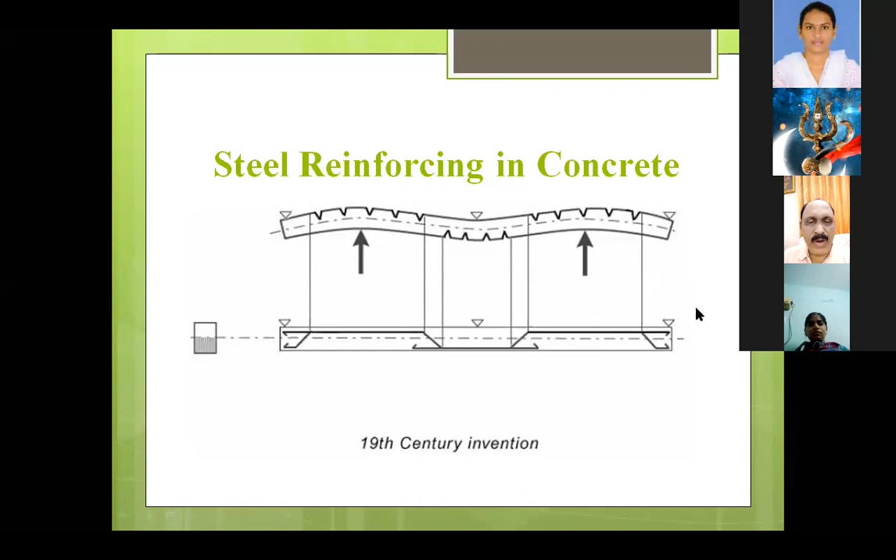The basic concept of concrete is that concrete is good in compression, but concrete is very poor in tension. Based on the capacity of the cement used, the tensile strength of concrete may vary from 1/5 to 1/15 of its compressive strength, based on the materials used. So basically, concrete is a strong material for compression.

In India we commonly use concrete from 10 to 40 Newton per millimeter square strength. But recently I have seen in Germany they have made a sample concrete of 150 Newton per millimeter square strength, so high that it is almost the strength of the erstwhile mild steel which we used.

So when the concept of concrete got popularized, people were concerned why concrete cannot be used on the tension side also, so that a concrete block can be used as a flexural member, on the compression side as well as on the tension side.

On the tension side, there was no choice because it used to crack. Then came the suggestion by some good scientists that on the tension side, if you reinforce with a material which is very strong in tension, that will become a balanced material. It can take tension as well as compression, so the longevity and use of the material as a flexural member is possible. That is how the concept of reinforcement came for concrete.

The reinforcement mostly available at that time was metals like steel and aluminum. Steel is basically a modified version of iron, with impurities up to almost 1% of iron being what we normally call steel. In very few cases the impurity level may go beyond that based on requirement, but normally we use very low-impurity iron as steel reinforcement.

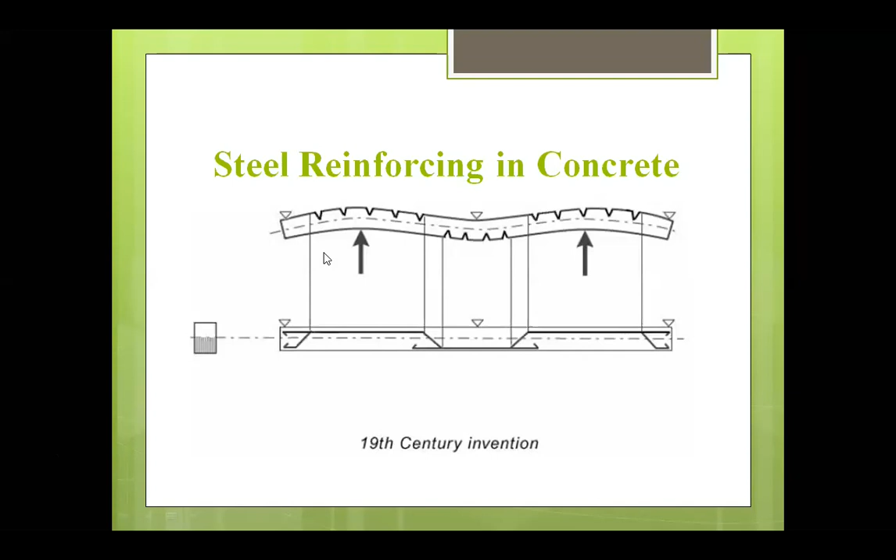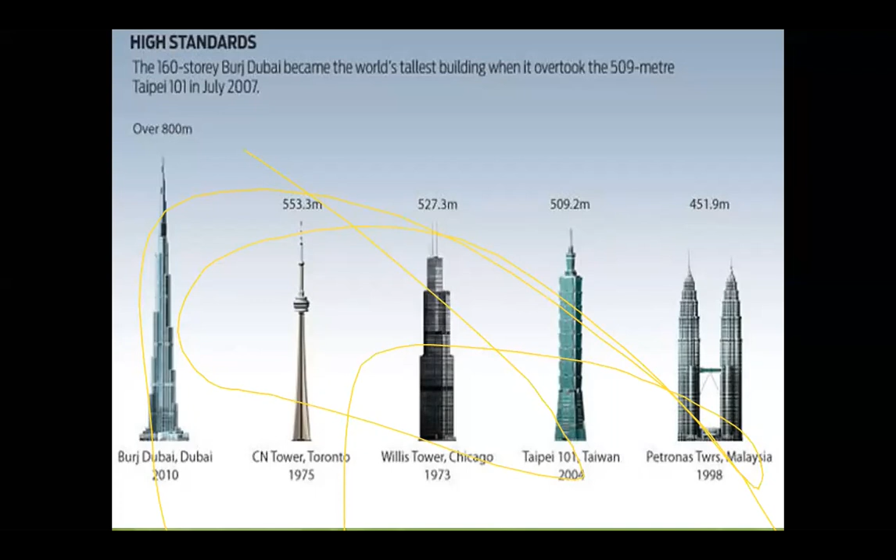Coming to the next slide, these are examples of the poetry I mentioned. The tallest building now available is the Burj Khalifa Tower. Actually now it is called Burj Khalifa Tower, earlier it was called Burj Dubai Tower. Now that it has been sold out, it's called Burj Khalifa Tower. It is 830 meters tall, nearly 1 kilometer. A new tower is coming up in Abu Dhabi, over 1,000 meters, taller than a kilometer, but it's not completed, so even now Burj Khalifa is the tallest.

Then compare it with the near-tall buildings. On the right you can see the CN Tower in Toronto, the Willis Tower in Chicago, the Taipei Tower in Taiwan, and the Petronas Towers, a twin tower in Malaysia. These are all close to it, but definitely the Burj Khalifa Tower surpasses them all. In that diagram it is given as Burj Dubai Tower, because when this comparison was done in 2010, it was still called Burj Dubai Tower.

At that time the building was around 830 meters tall, but on top of it, 244 meters is a single steel spire or steel column. So the building as such is only... am I right... 830 minus 244, that's 586 meters as the building itself, with 244 meters of steel spire above that. It's an example of a very well-designed building. Being the tallest in the world, it definitely has to be well-designed.

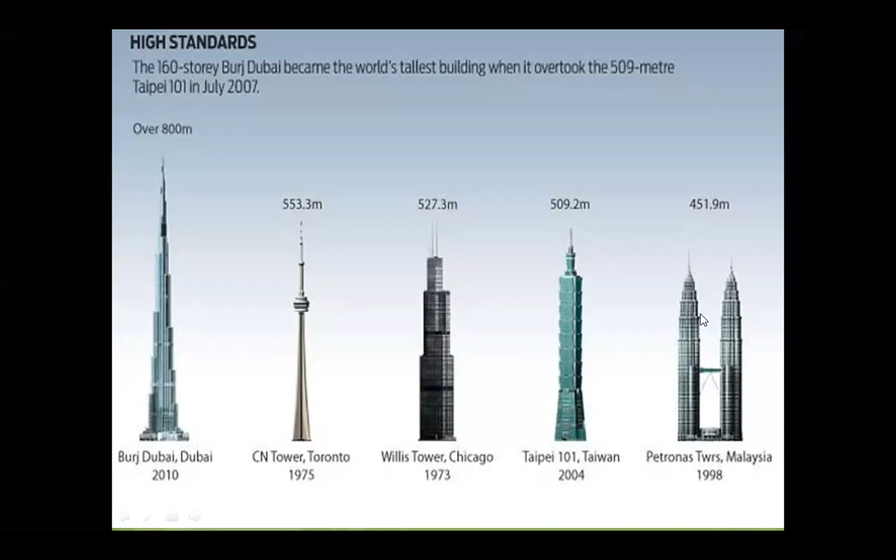Come to the next slide, you will get more information on how that poetry is made out of concrete. This diagram shows a part of it. The left side shows the steel spire, which as you know is 244 meters tall, and you see a man standing on the right side to show the human scale, how many people's height that tower is. On the right side you can see the foundation, though I don't know whether you can read it clearly.

The total weight of the structure is almost 5 lakh tons. Just imagine, 5 lakh tons is the weight of the total structure. And that steel spire alone, which is on top of that building, is alone around 4,000 tons roughly.

So imagine the weight. You can see the foundation given on the right side. That foundation has 1.5 meter diameter steel piles, and each steel pile has a 50 meter depth below ground level. 50 meters itself, if you give 3 meters per story, is around a 15-story height below the ground level.

So it's a very deep foundation, because the design was done by a Pakistani structural engineer working in the US. The most difficult part in designing this was, as those who know tall building design know, when buildings become taller, up to about 5 or 6 stories, the dead weight of the structure is the most important parameter for analysis. But when the building goes about 10 stories or so, it's not the weight which is the determining parameter—the wind and earthquake loads are.

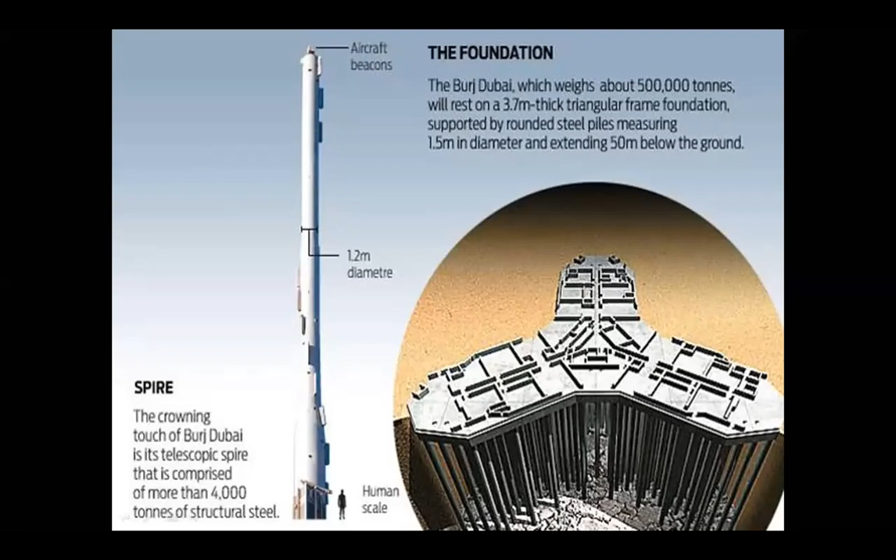Why I mentioned this is, every civil engineer should know that such poetry can be carved out of concrete. It's a concrete-cum-steel construction, though the spire is fully steel—the top and bottom are full steel. The spire is steel and the pile is steel, because steel is a good material equally good in compression and tension, and it's one of the best materials for construction. Obviously, they have made it rust-free steel.

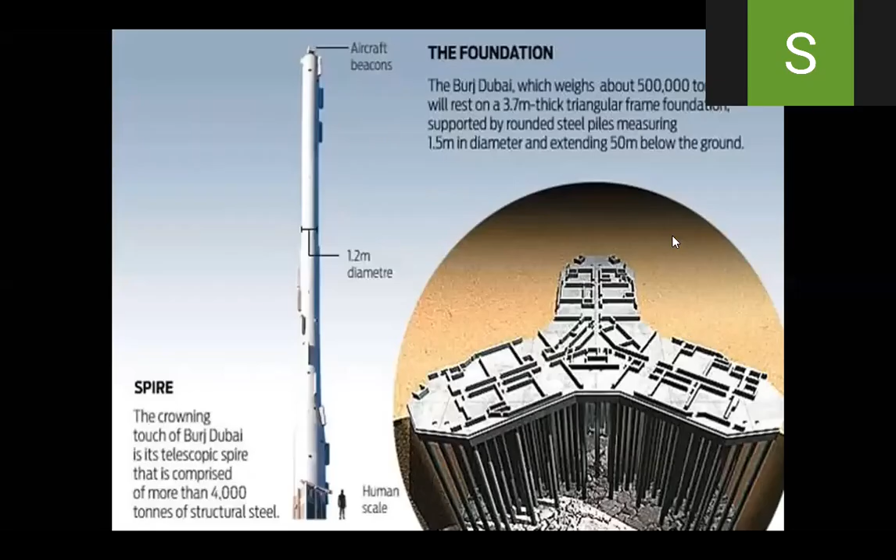I'm just showing a sample of a T-beam. All civil engineers know this. We have in a T-beam a web and a flange—the top portion is what is called a flange. Almost all beams in concrete buildings are only T-beams or L-beams; independent beams we never have.

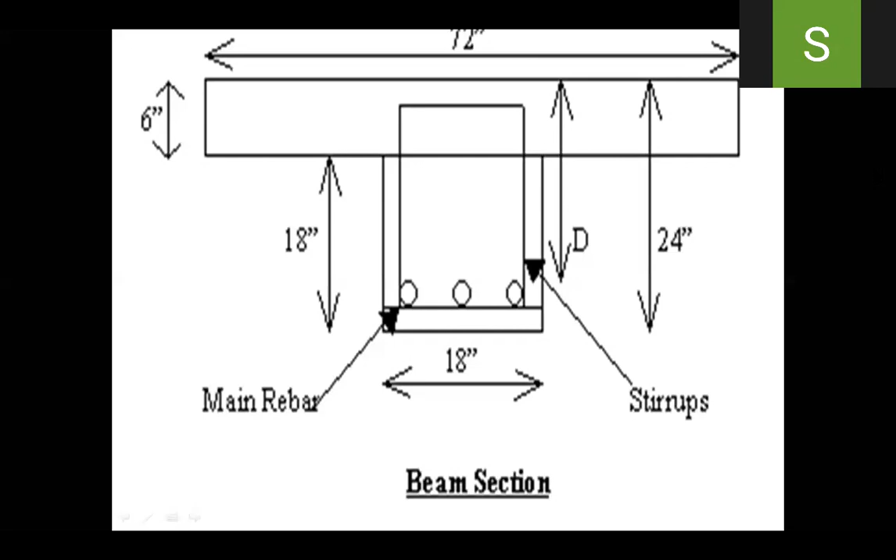But steel-cum-concrete buildings may have some independent beams which are rectangular in shape, though most of them are not. So I just wanted to explain the terms: the flange is the top portion, the web is the bottom portion. Most of the time, the main reinforcement will be rebar—which stands for reinforcement bar, a steel bar—and stirrup stands for the connecting steel, normally rectangular or circular in shape. I'm going through these basics for everyone to understand.

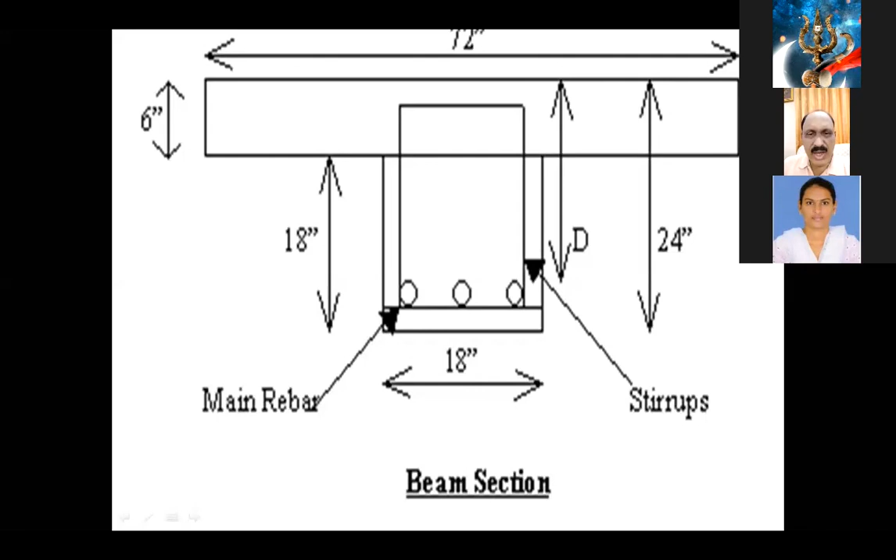And this is how normally a beam section in reinforced concrete will look. Let's come to the next slide.

Some more details are shown in the next slide. This is a reinforcement detail of a beam. On the right end is shown its cross section, and on the left side is shown its longitudinal section. So this is a detailing.

Showing the reinforcement in detail is called detailing. This is not with any other purpose; I just want to tell you that this is the way reinforcement has to be detailed when you give it to the contractor, because normally there are 3 people involved in construction. The first is the planner, who will plan the building with dimensions. The designer, who is a structural engineer, will design every element - the beam, column, footing, slab, pier - everything the structural engineer has to design and give in this form to the contractor, who has to construct it. He is the third one.

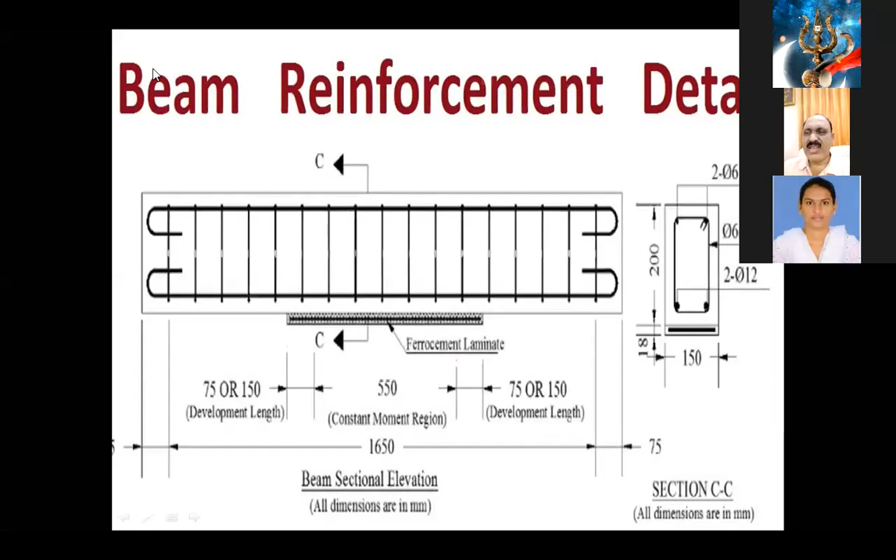Okay, now coming to the next slide. This is just to show how we submit the structural plans to competent authorities. In most corporations and municipalities, and in Kerala, most panchayats also, you have to submit for tall buildings the structural detailing along with the plan, elevation, and the layout plan of the building.

So this is a sample sheet. I'm not going to explain it, just to show for a beam how the reinforcement is shown, how the cross section is shown. Here 2 beams are shown: one is a continuous beam and one is a cantilever beam. This I'm not explaining because it's a sample, just to make you feel how the detailing is done. For experienced people, they know this. This is the way it has to be submitted, in a big sheet.

Now AutoCAD is used for detailing these things, and at submission time maybe such sketches, around 30-40, are on a big sheet, because we can go up to A1 size in AutoCAD. Some municipalities and corporations restrict it to A2 size, so that they can expand and see, because they are also having the software, they can expand and see.

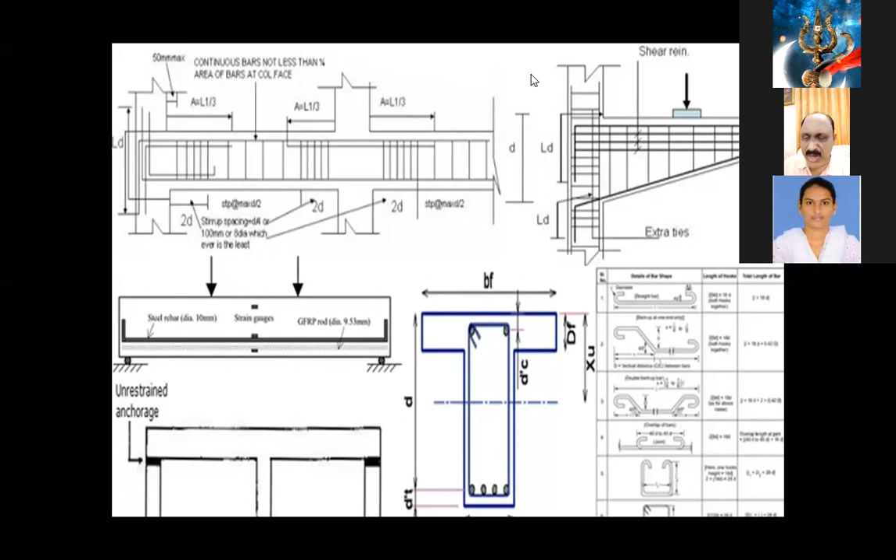Because in most of the analysis, 99% of the time, we take the joint, the column-footing joint, to be a hinged joint. We do not take it as a fixed joint, because those who know the analysis will know that in any analysis method, if it is taken as a fixed joint, so many indeterminacies will be there. The number of indeterminates will be high, so analysis will be almost impossible. Computerized analysis exists now, but we will get only an approximate calculation. That is why in most analysis, the column-footing junction is taken as a hinged junction. If you take the column longitudinal bars into the footing, it becomes a fixed or rigid joint instead.

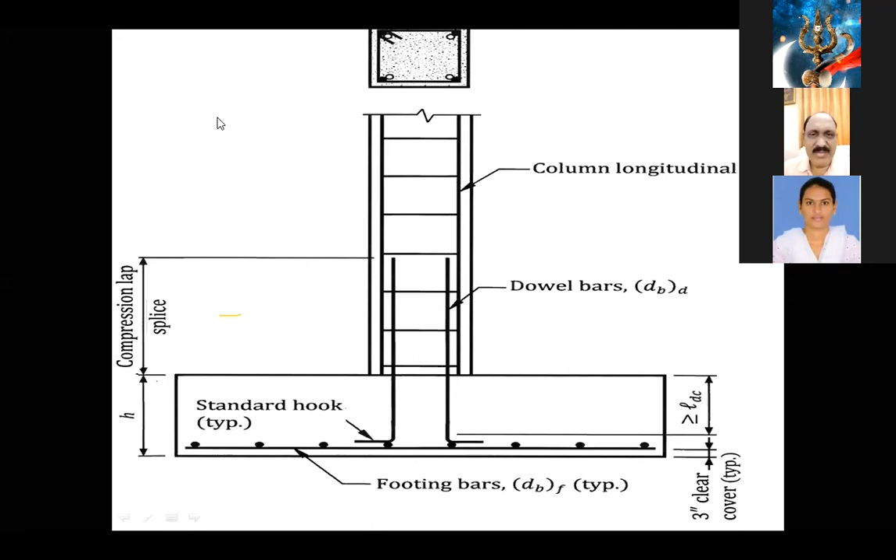Now, one of you can just comment whether you are hearing me properly and whether the way in which I am explaining is sufficient or some change is required. Anybody can comment. You can unmute yourself and comment and then mute. Not all. Clear. I'm not hearing anyone. I think somebody has put a message. Let me see that message. Chat box, some message is there. No, it has nothing about this question what I asked. Because I'm just imagining that you are understanding everything and you are seeing everything. Just wanted to confirm. Yes, everything is going on good, sir. Because in such an online session, I have to cross check in between whether things are going on well. Otherwise, I may not know. Yes, many have replied. It's going on well. Okay, now come to the next slide.

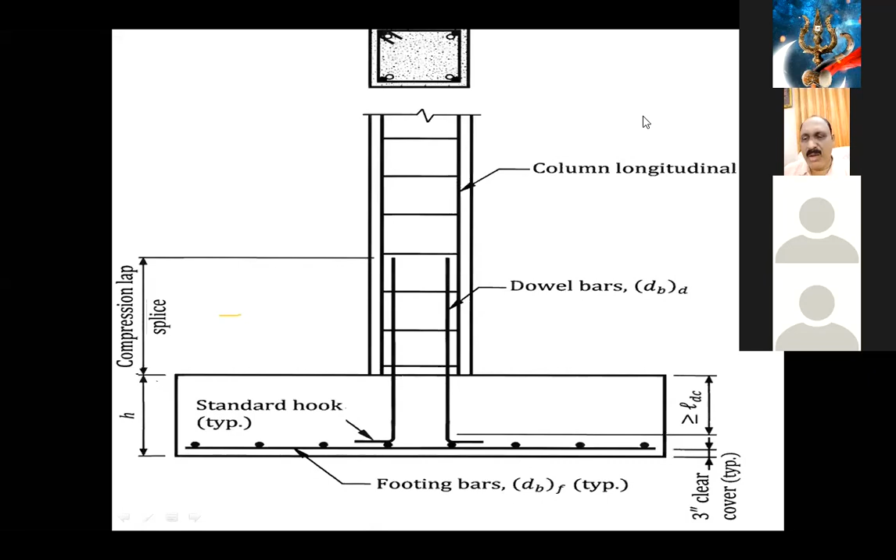Structural engineers may come up with a doubt why crack can develop there, because both end supports are there. Because in most of the cases, the columns at the ends will be having less moment of inertia compared to the column at the mid, which will be stronger or stiffer. So there is every chance that the ends can subside, the ends can settle, whereas the mid column will not settle. So this is common. I have seen many places. So there also this pattern of reinforcement should be given. I think you understood that.

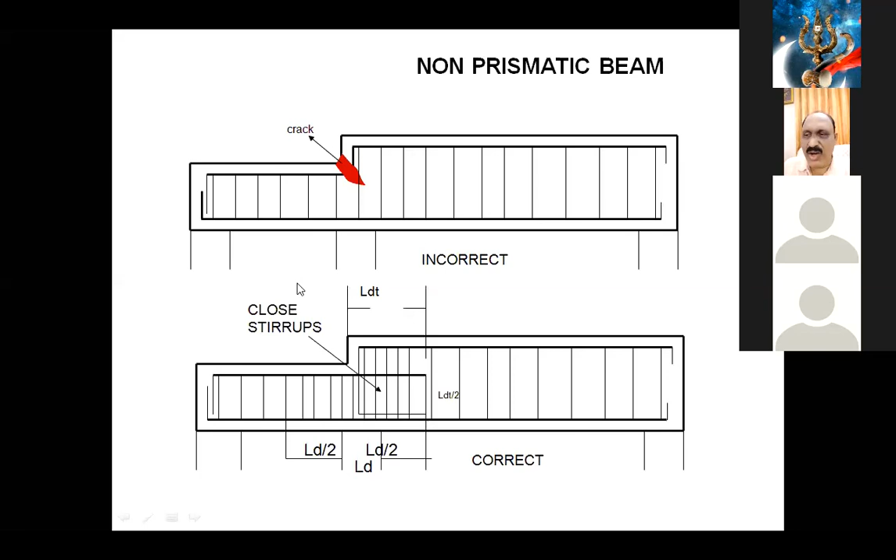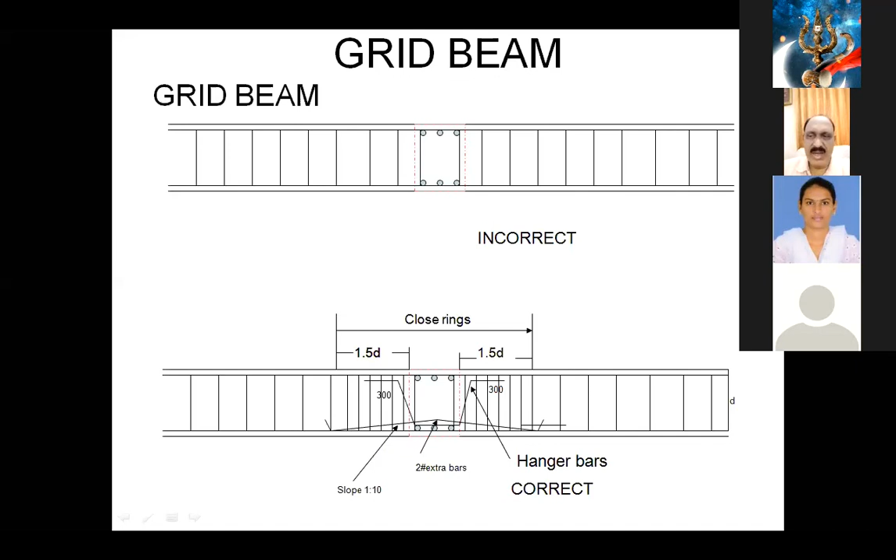Now coming to the next one, grid beam. Now what is a grid beam? A grid beam is basically one beam crossing the other beam. There are so many types of grid beam. For example, equal size grid beams are very common, which we use in grid slab. To reduce the depth of the beam, we will have a grid beam style where so many beams will be spaced at 1 to 1.5 meter spacing, and that makes the grid beam pattern. In grid beam, the main beam and crossing beam will have the same dimension.

So what happens is, when one beam is crossing the other beam, the one which is slightly higher in depth we may call the main beam. Or if one beam is having more reinforcement and the other is having less reinforcement, the one having more reinforcement we call the main beam. The other one which is crossing it is called the sub beam: main beam and sub beam. Normally, the sub beam is done in the way it is shown on the top.

You just see. But if the sub beam is done that way, after a period of time... for example, I had to go to one university in Kerala where there was a big building where all these sub beam joints had cracked. The registrar was very confused what to do. So we had to go and inspect, and I found that wherever the main beam and sub beam were joining, there was a crack, and students have to sit inside its classrooms. So we identified that they made this mistake which is shown on the top side. That is why I suggest this correction.

And many of these things which I am explaining will not be available in textbooks, because textbooks only give the standard design. So you can see the figure and study it thoroughly later. See, for example, in this correct diagram at the bottom, we have given what are called hanger bars, and we have given extra bars at the bottom with a slope of 1:10, provided for a distance of 1.5 times d, where d is the effective depth of the beam. I take it for granted that you know what effective depth and total depth are. Otherwise it's not usable, because only then can you use it properly.

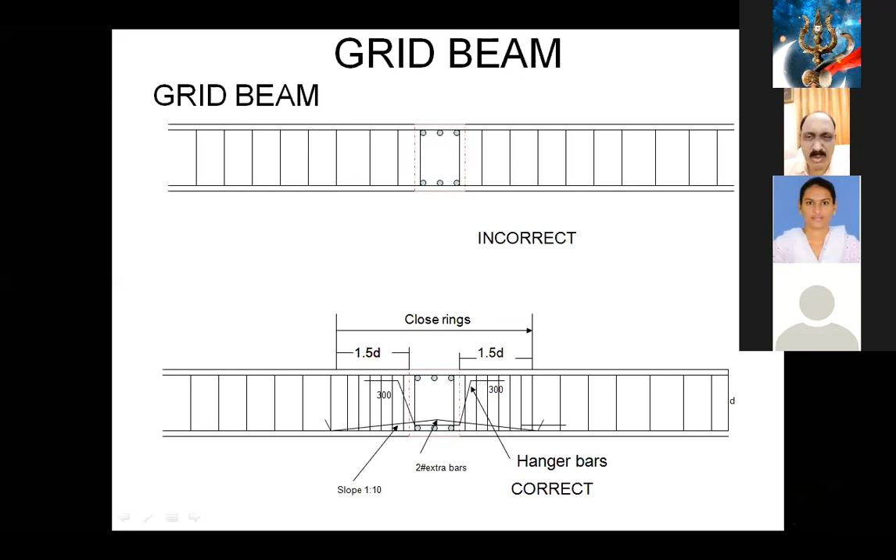Now coming to the next slide. When secondary beams are less in depth: in the previous case I said the secondary beams or sub beams and the main beams have almost the same depth. Whereas here, say for example, the main beam has 30 centimeter depth and the secondary beam, the sub beam, has only 20 centimeter depth. Secondary and sub are the same. In that case, you can go for such a pattern.

There also, if you go for the top pattern, cracks are likely, because any beam to beam joint or any column to beam joint, as you know, is a point of weakness, a point of crack, a point of discontinuity and a point of stress concentration. All this comes because of stress concentration there. Those who have studied fracture mechanics know that the stress concentration is many multiple times there. It can go even up to infinite stress concentration at some points. That is why cracks develop at all these points.

Now, the correct positioning I have shown below; that is the way it is to be done. Nowhere have I mentioned the bar diameter. The bar diameter depends on the main bar size you are using for the beam. Say, for example, the main bar of a beam is 12 mm. For the hanger bars and the additional bars, you have to provide the same diameter. Suppose you are using a stirrup of 10 mm or 8 mm; the same diameter you have to use for these stirrups also. That is why I am not giving those dimensions, because it depends on what size of beams you use. Come to the next slide.

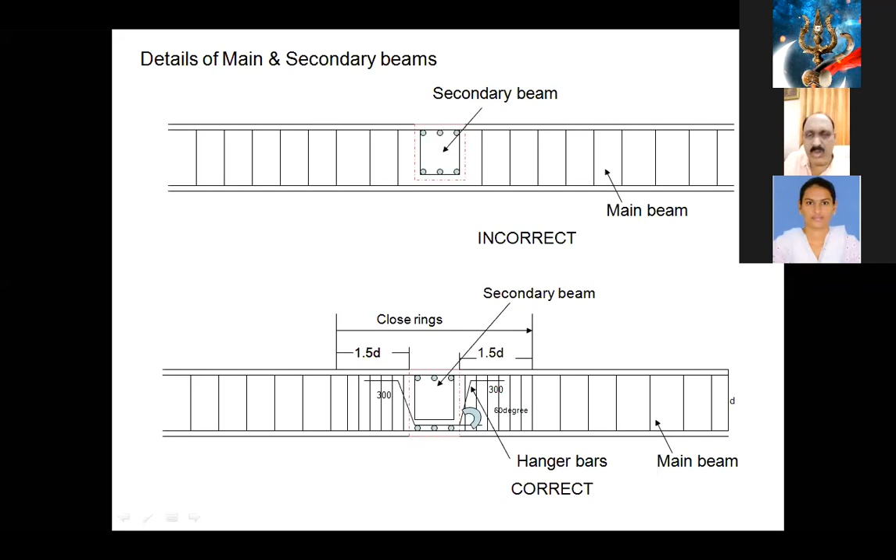It's a simple beam. Nowadays, we don't bend the bars like this. You see, for example, at the top, the main reinforcement is bent. You know by theory, in a beam, especially when a beam is simply supported or continuous, simply supported only with semi-rigidity it will happen. Otherwise, for continuous beams or fixed beams, the reinforcement has to be more at the top.

I was once inspecting a site for which the engineer was my student, and the span of the beam was around 5 meters, RCC beams. I found that the reinforcement was more at mid-span and very little at the supports. I asked him, and of course I had the liberty because he was my student, why the reinforcement was like that. And he said, sir, at midspan we need a lot of reinforcement. I said, it's wrong. You have the wrong conception.

In a big, long beam like this, where it is continuous, the higher concentration of main reinforcement is supposed to be at the end span, where the columns are supporting it. And that is very necessary. So this concept has not reached many people.

Many people feel that the reinforcement has to be more at the midspan. It is wrong. In beams which are having very long span, the main reinforcement, the highest quantum of reinforcement, has to be at the supports on the top side, not on the bottom side.

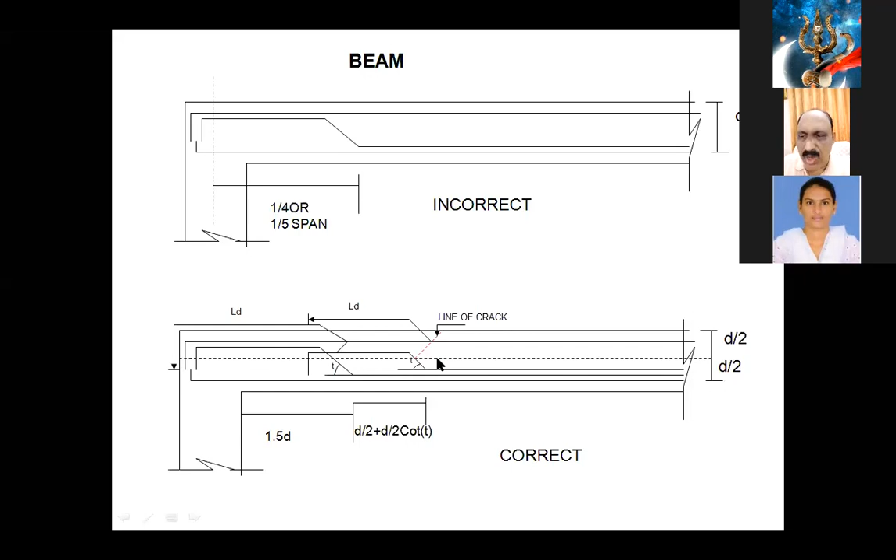Now coming to the next slide. The incorrect method is given on the top and the correct method is given on the bottom. See what is the difference? Many people go by thumb rule while placing the reinforcement. You would have seen that in most of the small works, even up to 3-4 stories, the beam and slab reinforcement, and most of the times the column reinforcement also, which is very dangerous.

They will say that for the other building we used this much. I've seen most of the owners and contractors saying, we did another building there, we used it like this, so this building also we are giving like this. It's a foolish thing, because when you analyze the structure, you will understand the difference in the pattern or behavior of the concrete and the structural member.

One simple experience I had: once I had given the design for 18 mm bar, because 16 was very less and 20 was very high. So I checked with the shop whether 18 mm bars are available. They said it's available, and I gave the design for 18 mm bar. By the time this contractor went to purchase the bar, 18 mm was out of stock. He purchased 16 mm and substituted all the bars of 18 mm with 16 mm.

When I inspected the site, he was saying, sir, 18 was not available, only slight difference, I have put 16 mm. But it's not a slight difference. The area of steel between 18 mm and 16 mm differs by more than 20%. He doesn't understand it, but being a designer, I can understand it. So keep in mind, such simple adjustments are very dangerous in concrete.

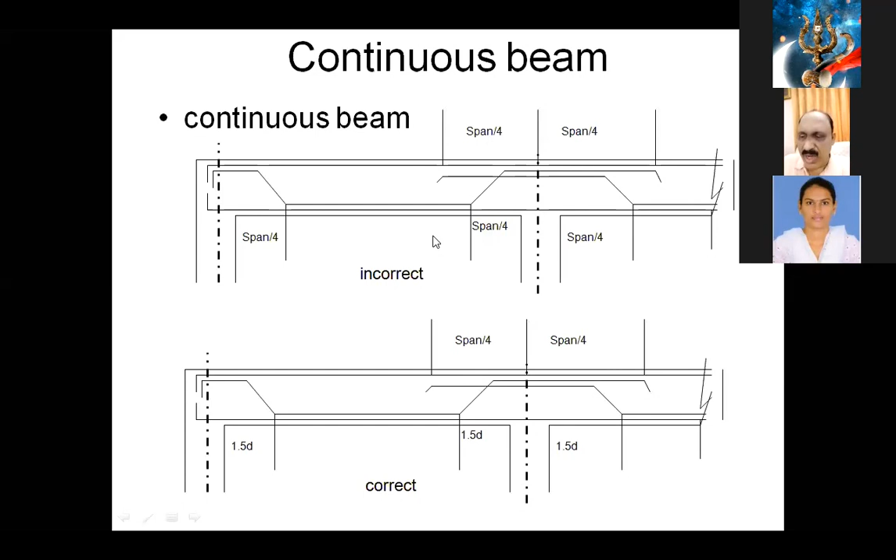So at some stages, I used to do only analysis on the software and used to do design independently, manually. But nowadays, what we do is we do the analysis and design on software. Then design, we will check element by element and correct it. Otherwise, it will be a big blunder when we give to the client. That is to be done. Designers, please note. Now, coming to the next slide, you see that slide.

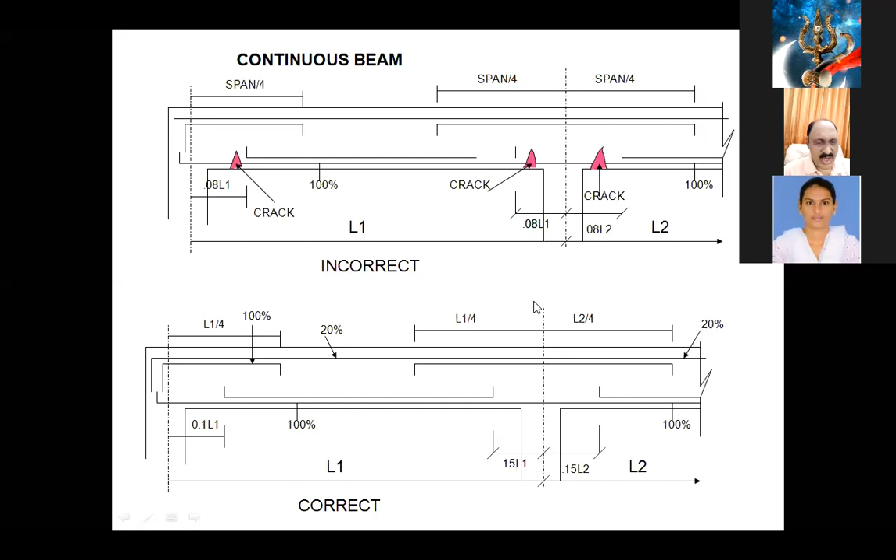Now see the mistake. This is self-explanatory. The diagram given on top is wrong, and the diagram given on bottom is the correct one. Because bending I cannot explain by word. You can see. I think it is visible to all of you. And those who are using a mobile, you can expand on the screen itself so that you can see it big.

My last webinar, somebody was asking, sir, we are seeing only small sketches. I told you, just expand. You can stretch on the screen. Now come to the next one.

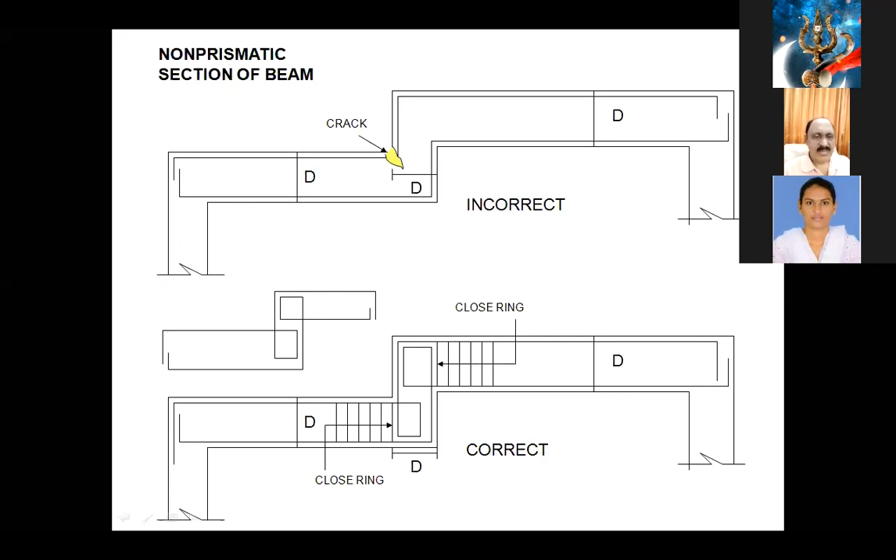For a cantilever beam projecting from a column, you can see the top one. The column is on the right side. Cantilever is projecting left. In column beam connections, there is what is called a pull-out phenomena. This type of construction I have seen many places. The top diagram, I have seen many places where the cantilever will be hanging gradually.

And why should I say other cases? When I was studying third year BTech, I designed some beams for my own home, where I was not thorough about this pull-out mechanism. And after 3 years, I have seen that cantilever beam end is coming down.

So this can happen to anyone. So that is why you see the bars on the bottom diagram, where the main bars on the outer side of the column have to go deep, at least to one development length below. Even more is better, so that no pull-out occurs.

This type of construction many times happens in small houses and all. Small cantilever just projecting out, either for a car porch or for some supporting structure. It can happen. So be careful that the textbook will not say exactly this pattern. The textbook will show that the reinforcement has to end there. That is why I'm showing it specifically.

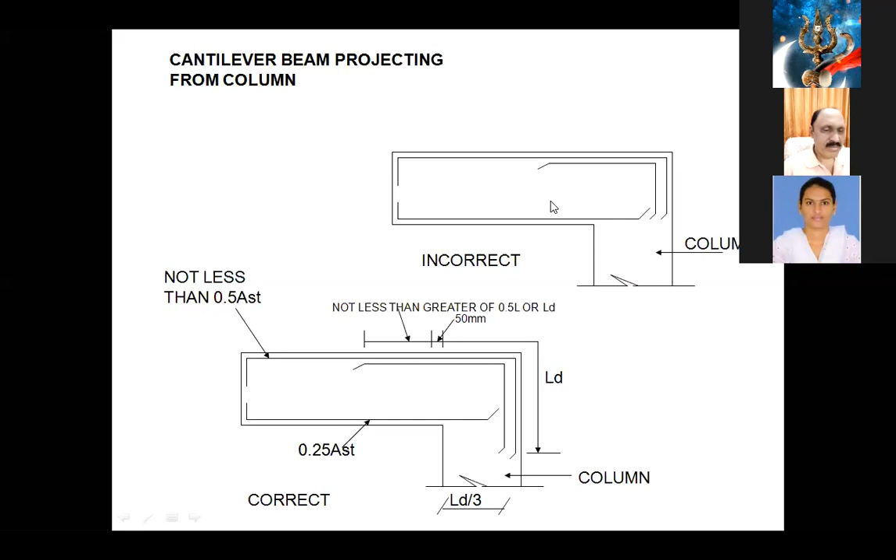Now see the next diagram. This is a very common mistake I have seen in Kerala, because in Kerala, the low-cost housing popularized by our Kerala State Nirmithi Kendra and the Laurie Baker movement, they have gone for such roofs of small span, 10 to 15. Of course, they have done the reinforcement properly, but the people who imitated, and many school buildings I had to inspect for such cracks. School building may be 4 or 5 meter span.

LD stands for the development length. Don't worry about minimum LD. You give a bit more than LD, because normally in such slabs, the reinforcement diameter will be very low. You know, most of the sloping slabs will have only 8 mm reinforcement. Even 10 mm is very rare. Okay.

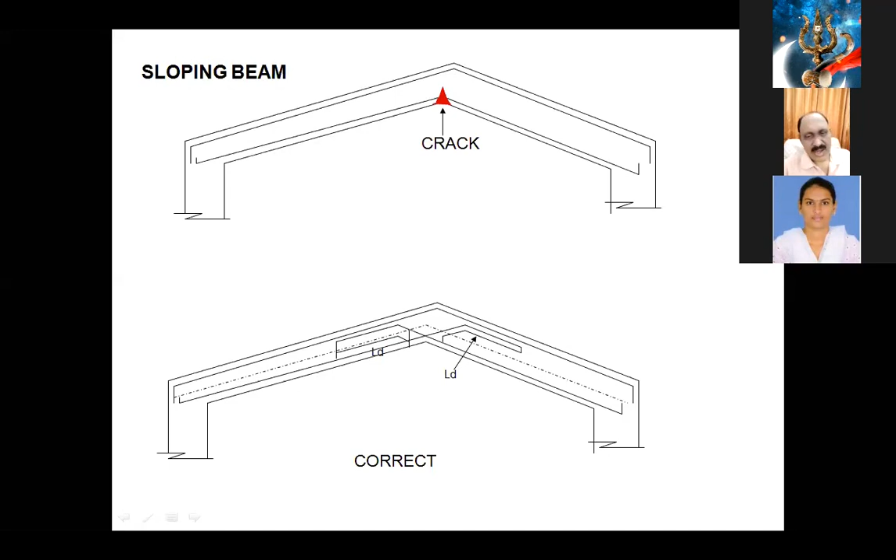I know that many of you will have so many doubts regarding all these things, because you take this only as an introductory session. And if you have to go deep into how much should be the diameter, how much should be the spacing, etc., it has to be problem specific. It cannot be generalized. Many people do ask me specific cases. I ask them, you draw your reinforcement pattern and send to me. I'll say what is your mistake. That will be the easier method. Now go to the next slide.

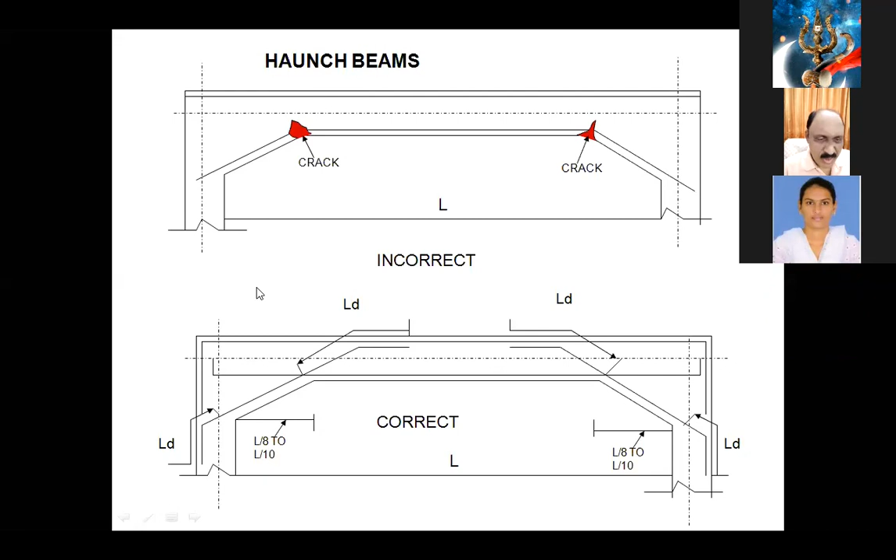Any folded plate, whatever is the method you use for analysis, many methods are available for analysis. Nowadays, even computerized programs are there, but whatever is the method, the analysis will give the steel uniform, but that point is a weak section where we'll have to see that both the steels are extending inside instead of bending there. They go straight, don't bend there, so that they will overlap each other to a development length. That is what I have shown in the previous sketch. Now coming to the next slide.

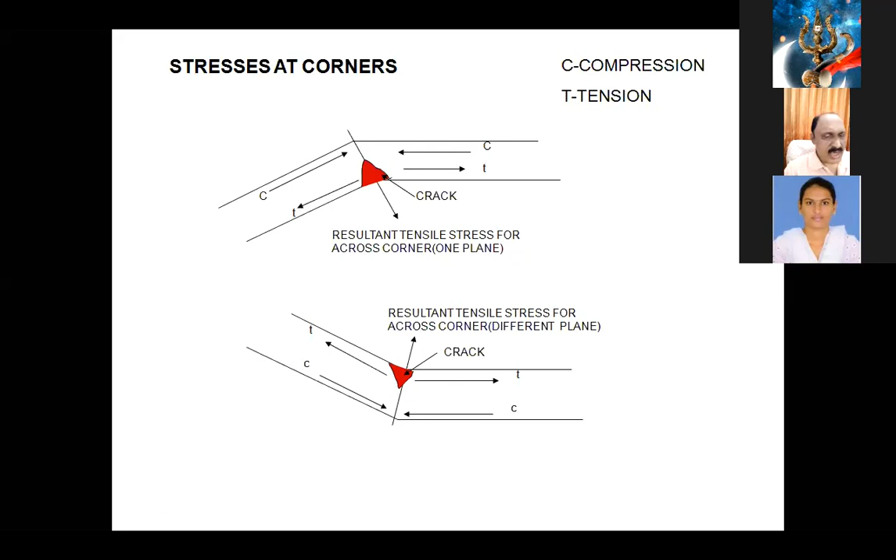Many people are concerned about giving the tension and compression reinforcements. Many times the shear reinforcement is ignored. Remember, in deep beams, the shear reinforcement is equally important as the tensile reinforcement or compression reinforcements. And that is why if a beam is more than 1.5 feet, or nearly 45 to 50 centimeter deep, more than that deep.

It depends on the depth of the beam, but always keep in mind, any beam more than half a meter, be careful about the shear reinforcement. Otherwise the crack pattern which develops will be shear cracks. You can easily identify a shear crack on a beam because shear cracks will be angular, whereas tensile cracks will normally be perpendicular. So just by seeing a crack, we can say what is the problem with the beam, by experience.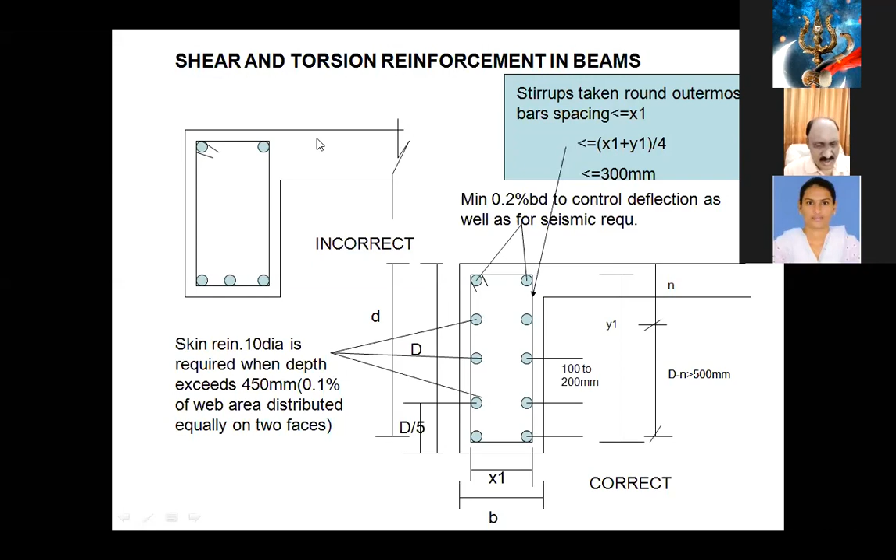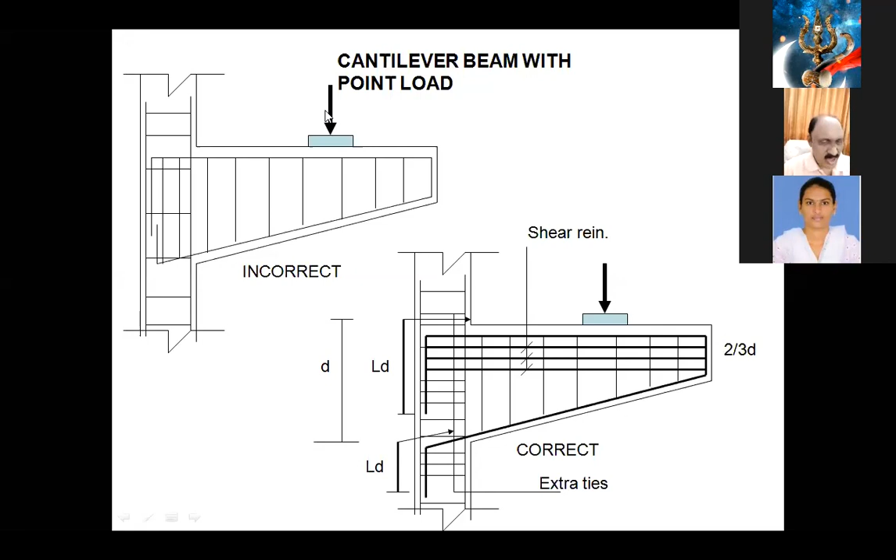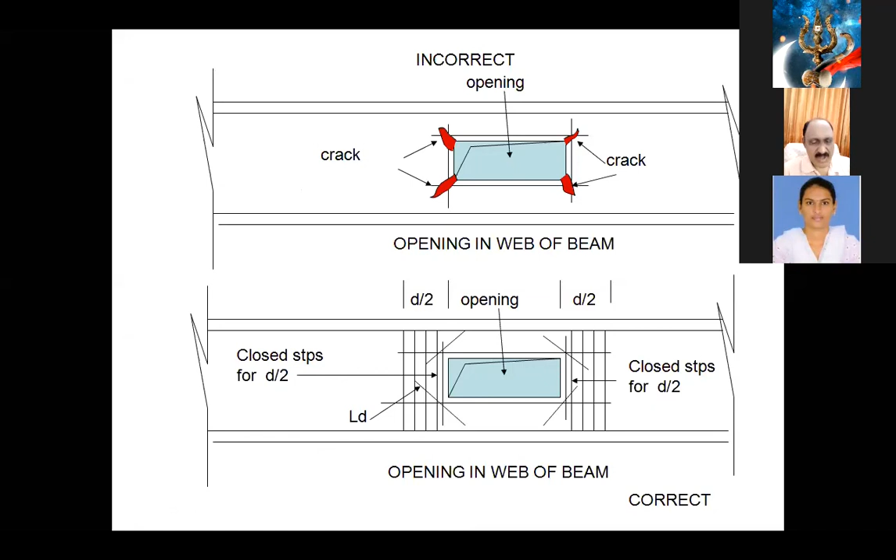You have not shown that. Your slide is even this one. This is the slide, not this, the next one. Okay, okay, this is a slide which I was explaining. Now go to the next slide. Now you can go to the next slide.

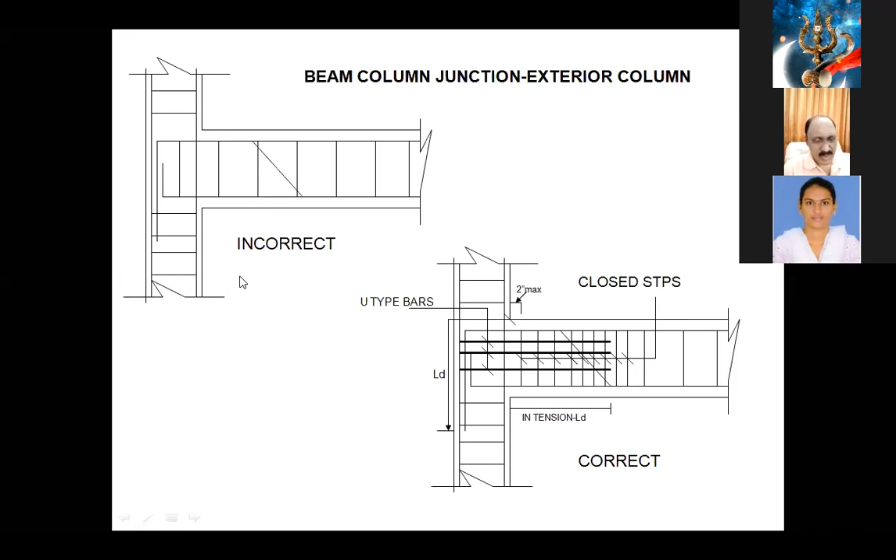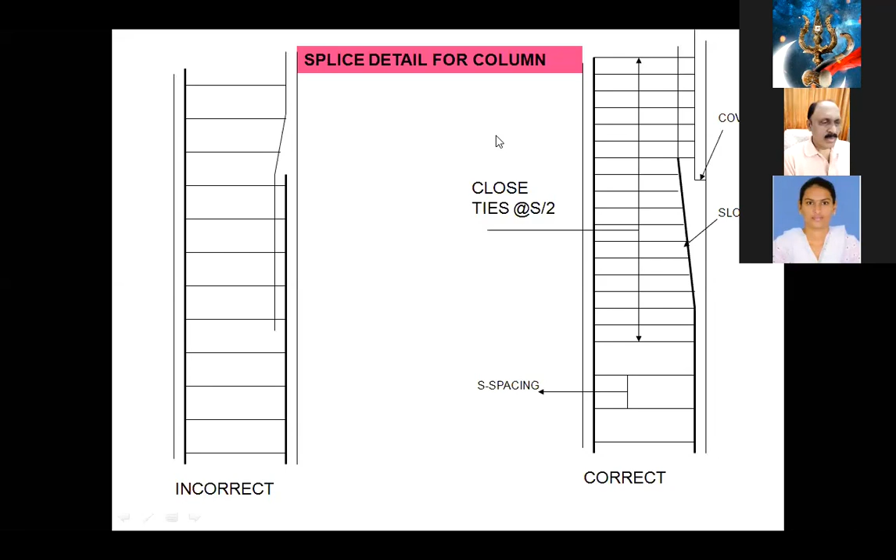Suppose the column is reducing in size. You see there, this is where a lower story and a higher story meet. This you will have come across many times.

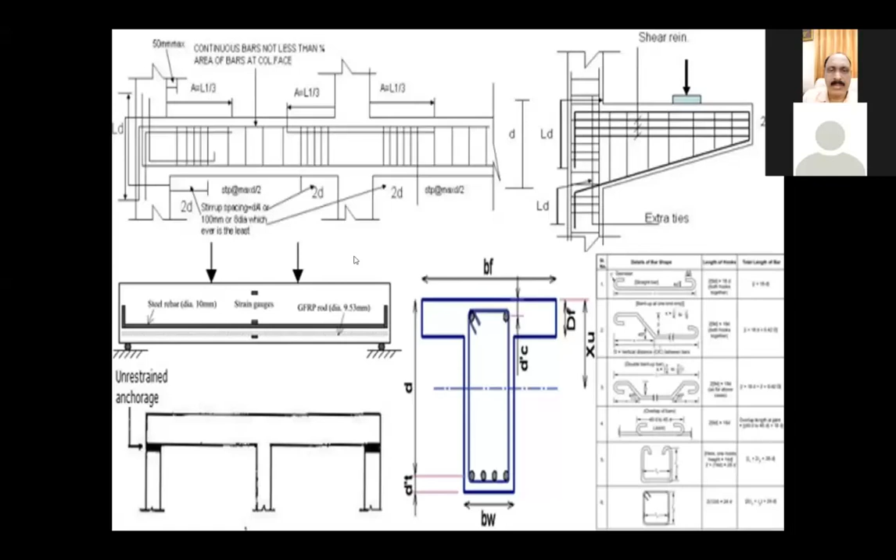Future construction materials should be different, not becoming that common. Maybe after 10 or 15 years, reinforced concrete came to India in the early 20th century, and then it became popular only in the 1950s and 60s. Households became RCC only in the 70s. So it's very recent, only 50 years we have seen this boost of concrete used in construction.

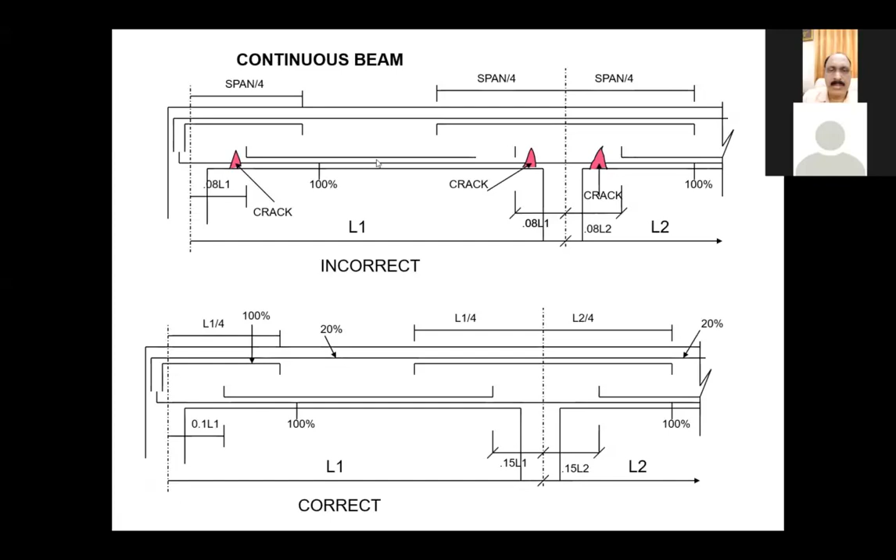It will go away. Moreover, post-corona, post-COVID, construction technology is going to change drastically. Now people have some other concern. Instead of show-off in a building, concrete has been used as a show material because it's a bulk material. Anyway, all that will change. I'm not going into a detailed session.

There is another question. How can we fix the problem raised while laying foundation in the area where the water table is high?

In the area where water table is high, we have many techniques which we use. One technique is dewatering. We make a big trench nearby, or in the same trench we make a small trench in the corner and we just pump it out. That is one method. Another method is we use either hydrophobic cement or quick setting cement and we can do the concreting. And the third method is we will wait.

That is what I advise people, when the situation dries up. Instead of going for construction in the rainy season, it is highly uneconomic. If there's a chance that the water table will go down, wait for that and then have the construction. These are the techniques we use.

Then another question: a textbook showing incorrect and correct reinforcement details would be useful. Such a textbook is not available. What I can do is give you this presentation, which has the drawings and explanations. Such a textbook I have not seen in my life so far, so I cannot advise you.

All the textbooks will give the design and reinforcement, but they will not go into the meticulous nature of how it is to be placed and how not to be placed. In one or two books I have seen some guidelines on how not to place it, but very rarely.

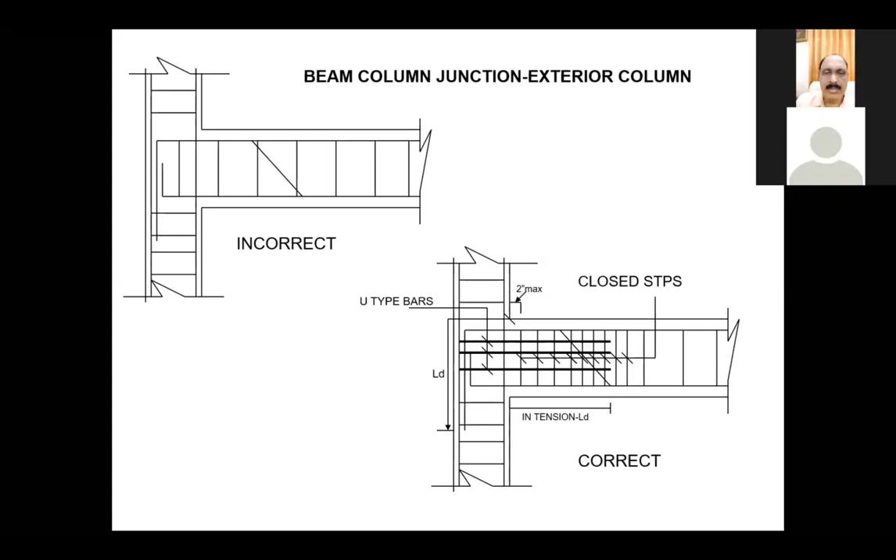What is the reason mild steel doesn't break immediately? Mild steel has got a long yielding time. You would have seen the stress strain diagram of mild steel. Once the yield point is reached, it slowly comes to the plastic range, remains in the plastic range for some time, and then only it again elongates. That is the advantage of mild steel.

From the earthquake point of view, mild steel is better, but it is highly uneconomic. If you use mild steel instead of TMT steel, you have to use more than double the quantum of steel. But if you are very specifically aware of an earthquake area, and the steel quantum required is very less, it is better to go for mild steel even now, because it shows symptoms of breaking before it breaks, giving you time to escape. Whereas TMT steel or HYSD steel will not give you that symptom. Maybe you are inside the building, and all of a sudden the building can fall down. That is the difficulty with high strength steels available now.

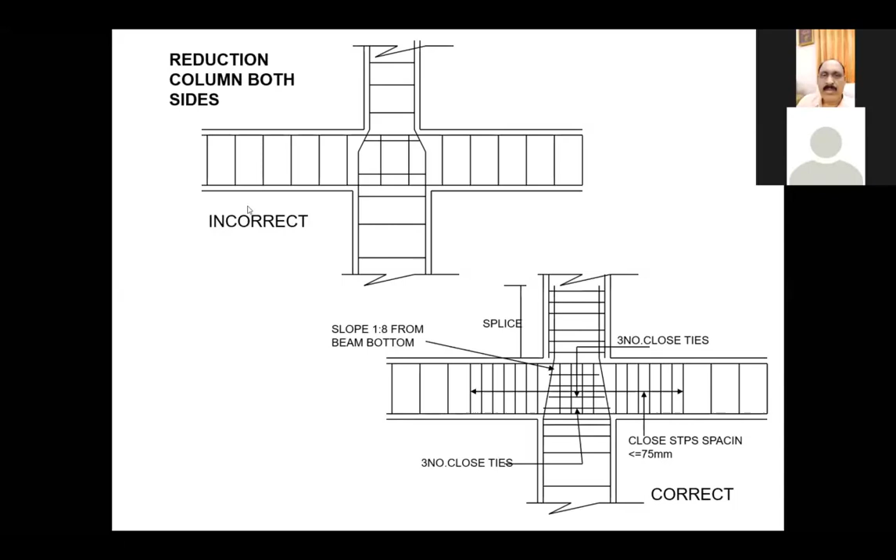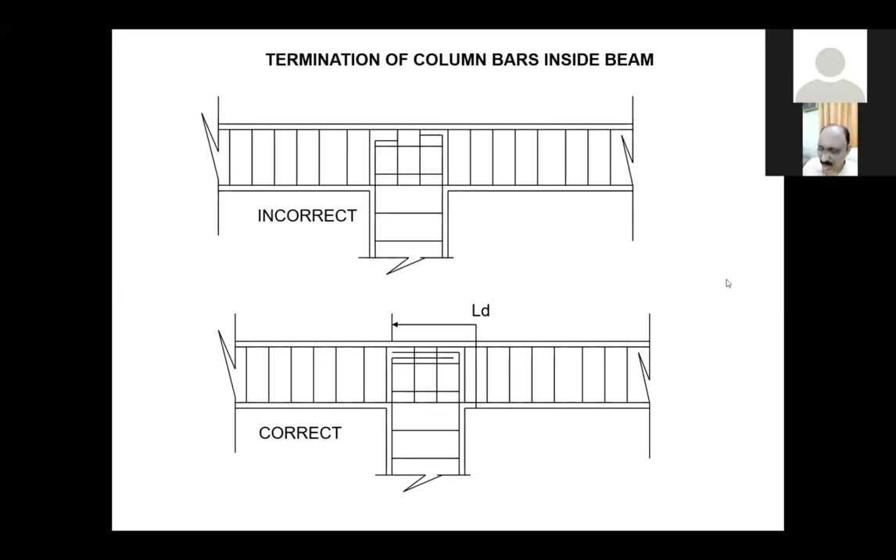It depends on the region where the structure is, which earthquake zone it comes under, and what is the size of the element—this length will change. That is why it is just given as a notation. It's not defined, but this is the way it is to be given.

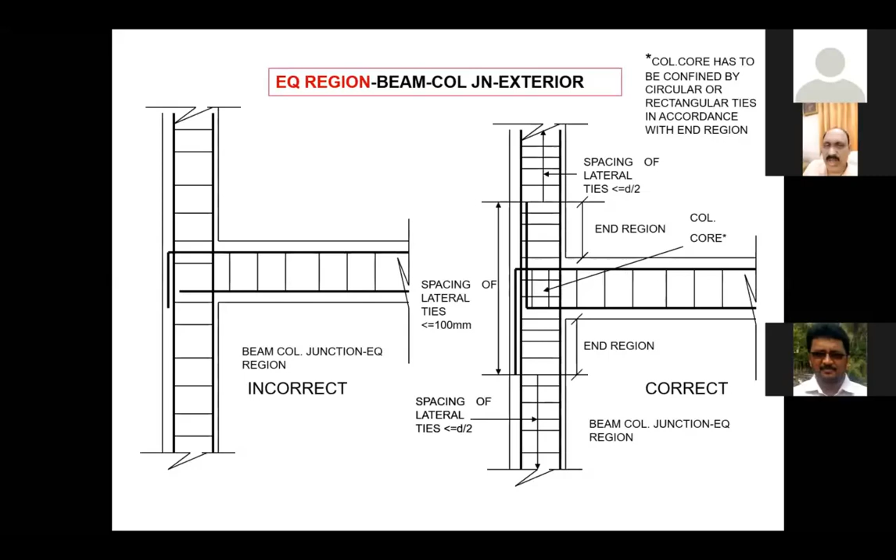Now come to the next slide. The column details in earthquake region.

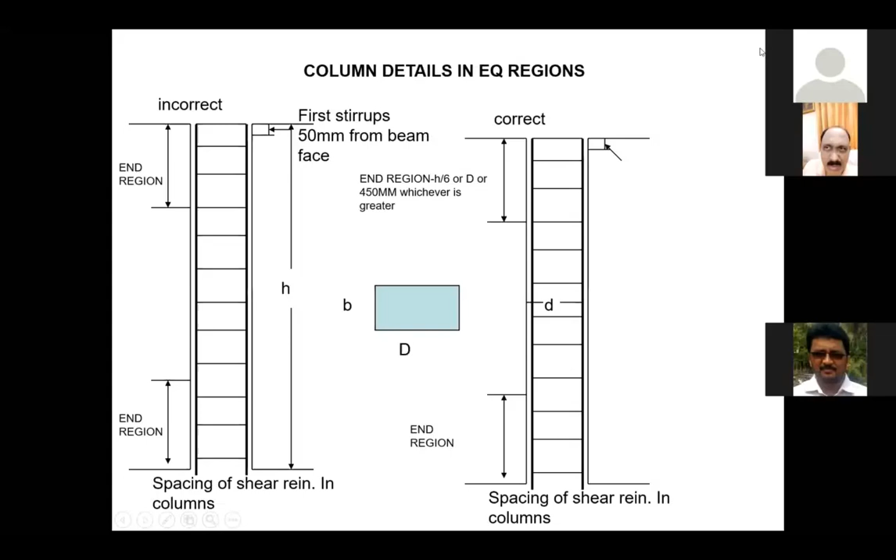In earthquake regions, earthquake always causes shear in the member, so you have to be very careful. Earthquake has got two actions: lateral movement—you know, earthquake P waves, S waves, etc., you have studied. One type is horizontal movement, which we call lateral movement, shaking—it will just shake you like a shaker machine. The other type is a thumping movement, moving up and down. The shaking movement you can feel only if you are standing outside. The thumping movement you can feel if you are lying down somewhere. Okay, so whichever is the case...

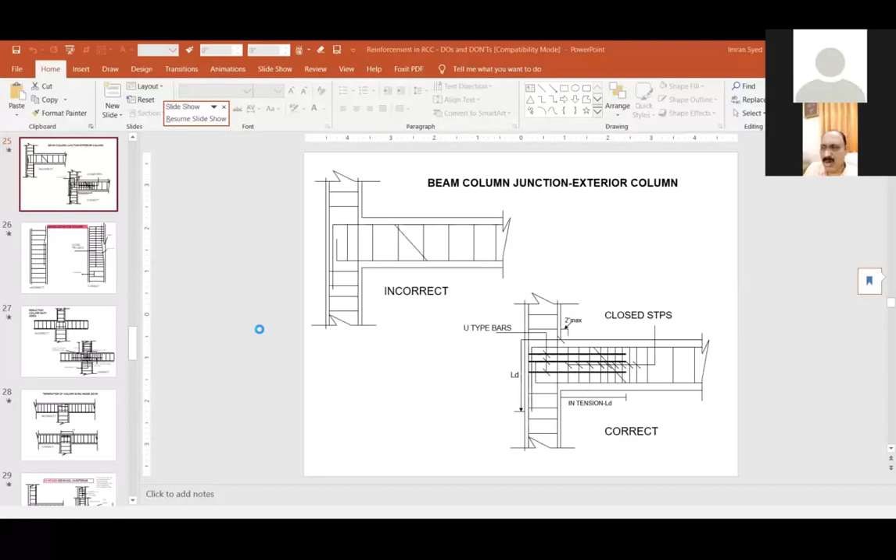Lateral shear is very possible in earthquake structures, and that is why... the display has gone down again, I think. Okay, it will come back. You can come down to this—column details in EQ regions. Okay, right, this is it.

Column movements, column details in earthquake region. In ordinary places, we give the spacing of reinforcement at an X distance. In earthquake regions, the shear reinforcement has to be closer, especially towards the bottom. This is more important—both figures may look alike, but in the right one, the shear reinforcement has to be closer. That's all.

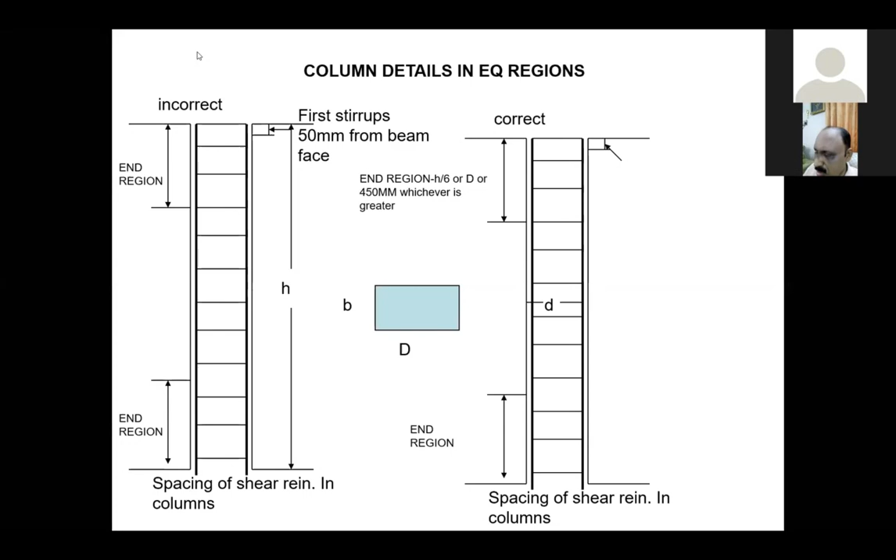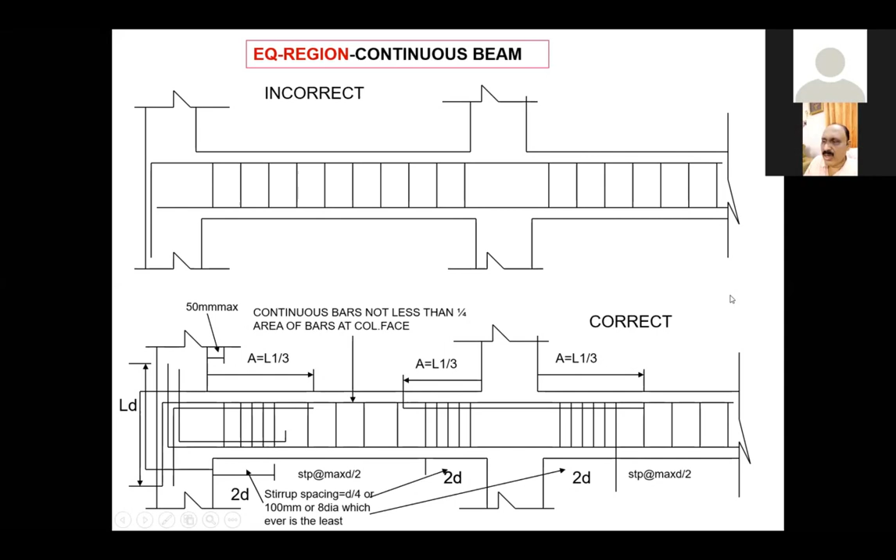See the reinforcement pattern given at bottom. The size of bar, length, etc. I'm not saying now, because design is something we should not copycat. Design is something which you have to take case wise. For easiness and to avoid consultancy fees, people do copy designs, but that is very dangerous. Some days it may have adverse effect. Sometimes it may have more cost involved. Come to the next one.

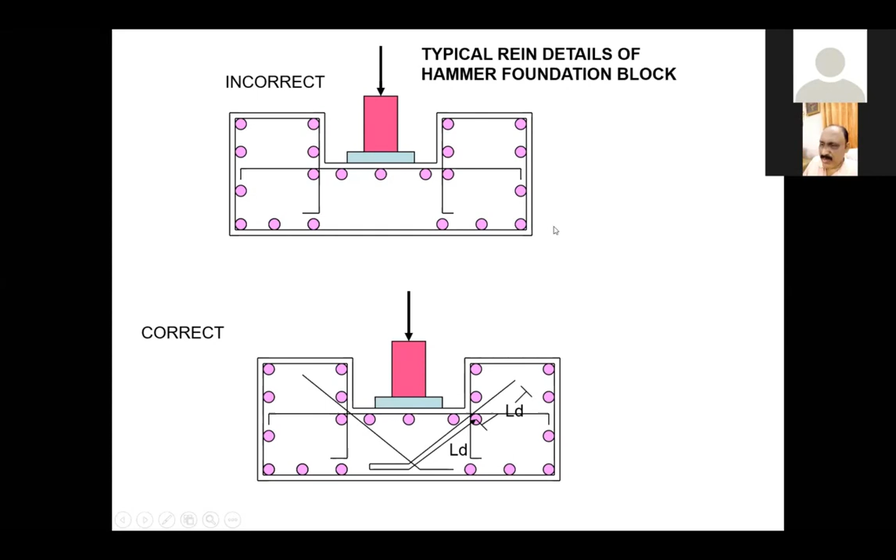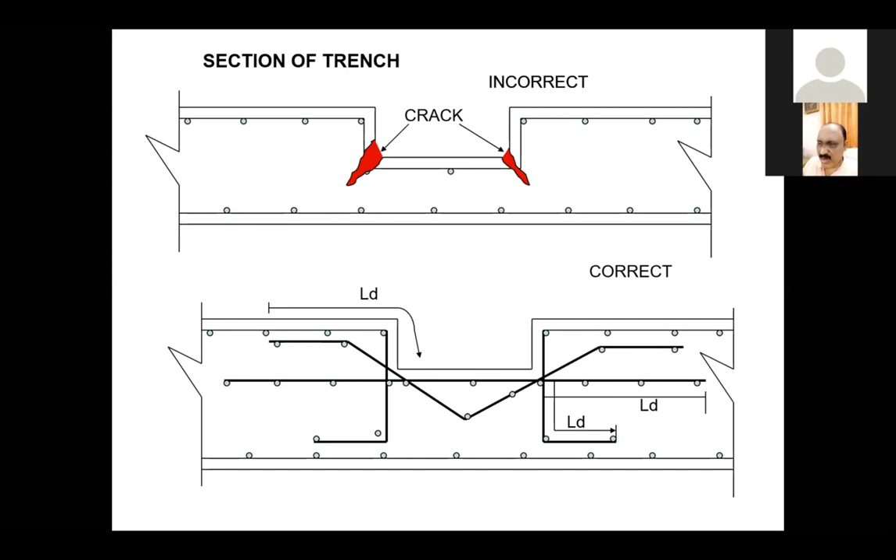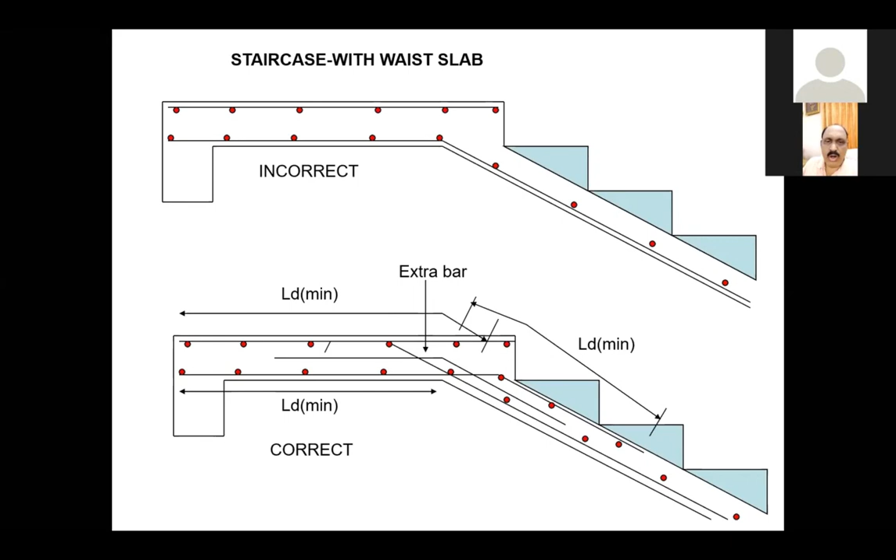So I think I'm talking about the previous one. Previous one, yes. See this, and then we will go to the next slide. This is one method of giving the reinforcement. Another method is the next sketch. You can see.

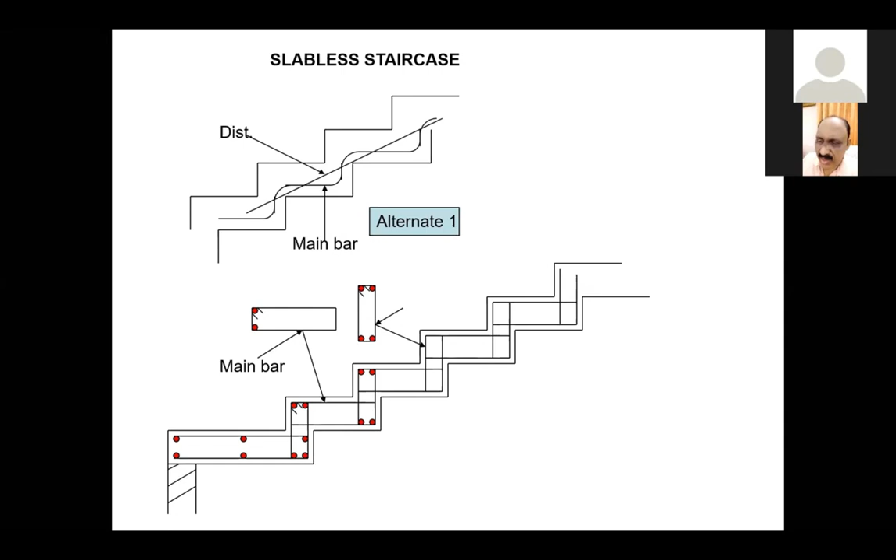This is one method. The previous case is a staircase with a waist slab. This is for the steps by themselves, without a waist slab. It is a fashion nowadays to have the stair without a waist slab. This can be done one more way. Next slide, you can show the next way, how this can be done. You see how it is done?

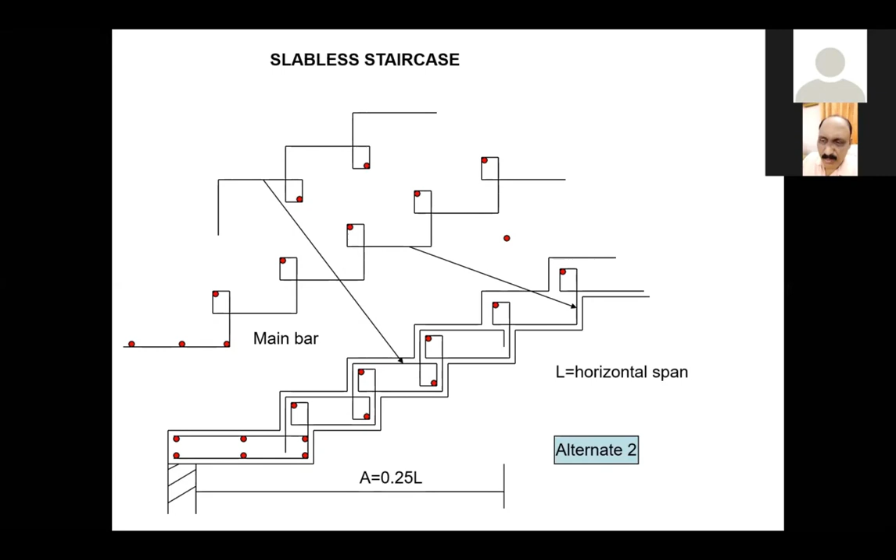Whenever somebody is making a staircase, just see how they are doing it, so that you can advise them not to do like that, because every step will have a crack in the future if it is not done in any of these methods, and people go for easy methods. And see the next slide. That is not very important for you.

Why 8 mm onwards? Because in beams we advise only from 8 mm onwards. We don't advise 6 mm. For slabs we can go for 6 mm. But in the market there is one steel bar which is 5 mm, which is not in the IS code. IS 456 doesn't give this 5 mm.

But that 5 mm bar is the most sold bar because it is very cheap. It is normally made from scrap steel, but I advise not to use that steel. 5 mm is not a standardized steel because it's very weak. The thinner the bar diameter becomes, the lesser the strength, based on geometrical factors.

Okay. Now coming to the next one, do's and don'ts. Of course, many of these do's and don'ts I have shown by sketches. Now I have given a list. Almost 1 hour 20 minutes we have taken. There are so many slides which I have given in detail on the do's and don'ts while doing the concrete. Should I go explaining each one, or can it be easily read and understood? I leave it to you.

I'll just show this. You can show the slides one by one and then come back to this. Show all the next slides one by one. Then maybe after the discussion session, if somebody wants, it is verbal explanation. You can easily understand without me explaining it. Just show the next. Next.

Those slides, I don't know whether you want, some of you can give an expert opinion. Maybe someone from the civil department can tell me, should I explain these slides one by one, or can the participants read them, because it's all text material, you can easily read and understand. What do you feel? Somebody can comment, orally or in the chat box, whether it should be discussed or not.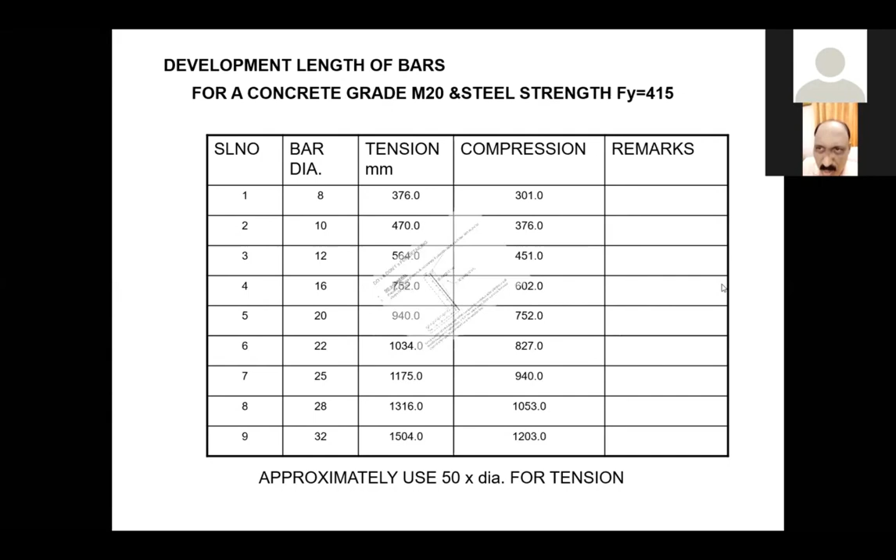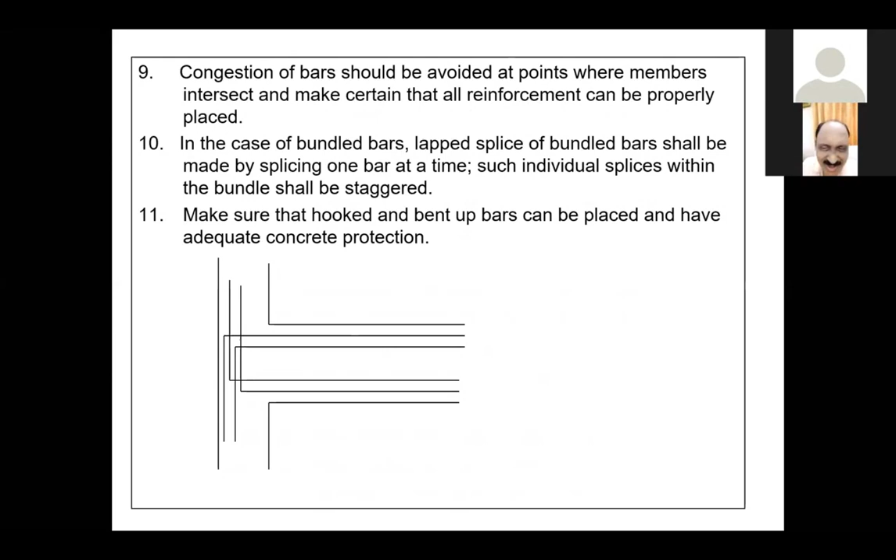I think all the points have been briefly and neatly explained in the upcoming slides, sir. So you want me to explain or not? No, I think there is no need for the explanation, as you have neatly mentioned everything here. Okay. But I have a doubt whether you will read it again, because after most presentations we leave it there. Anyway, it's up to you to decide. But time is an element; I would take some 10-20 minutes to explain.

So if you think there are some complex points in all these... these are self-explanatory. These are all in simple words. It is all self-explanatory. You can read and understand.

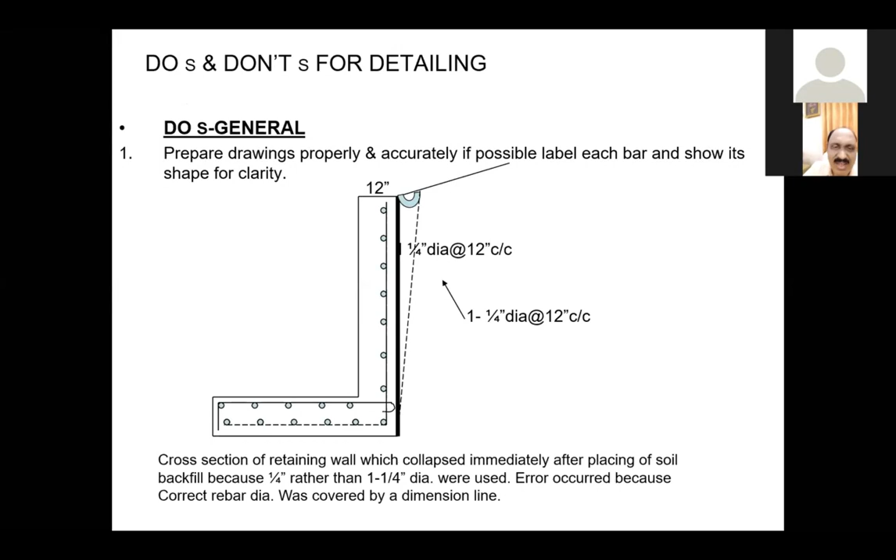Only if you are in the field and need consultation, because many engineers and supervisors do call while they are in the field doing the work. Mostly the bar benders will come and ask the doubt, and only then will they be concerned about this. That's the usual thing.

I think whatever data you have provided here is good enough for us. Right. Now some more questions have come before closing. I'll come to the comments one by one and quickly explain them.

Which grade of steel I have told for earthquakes. Then, what type of failures occur if we do not provide proper crank length in a continuous beam? The type of failure depends on the structural combination, not on a single element. So we cannot predict whether the weakness is coming in the column or the beam or combined. So predicting which way it will collapse is difficult. And even if a crack has occurred, sometimes it may not collapse because of the combined mechanism. You have studied the collapse mechanism. Sometimes the combined mechanism will not collapse. It may stay back. So that is not predictable.

Then the next one is, you can author one such book. Let me see. I'm holding so many responsibilities now. I have authored 10 books, but in the last 10 years I have not authored any book. Maybe we'll think of it. I take your advice strongly.